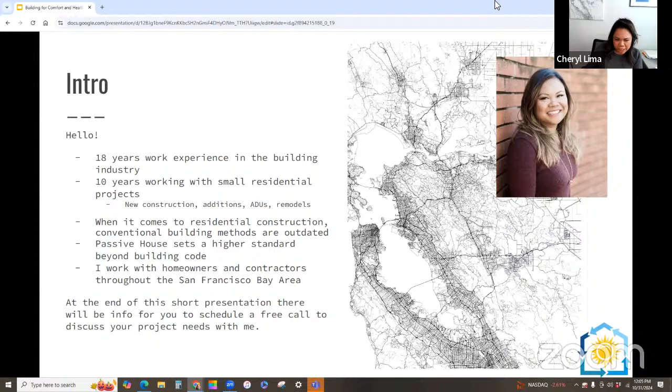So let's just keep moving forward. Today we're going to talk about the key principles of Passive House and how you can apply it to your project. And the way I see it is if you're going to be investing in your property, you might as well do it right the first time. And with the way climate change is going, whether you accept it or not, it's a factor that we have to deal with. So Passive House allows you to stay ahead of the trend as far as building advancement.

So the term passive, it's been around for a while with different meanings. Since the beginning of civilization, we have had to design our built environment around the natural patterns of the sun and weather based on your location. And with the invention of mechanical systems and more sturdy building materials, we've been detached from nature.

And actually in the 70s, the passive solar movement started, or I guess in the 60s it started up again. But that form of design didn't quantify the effects of energy, and a lot of times they put too much glazing or too many windows in direct sunlight, so it would create a very uncomfortable home environment or building environment.

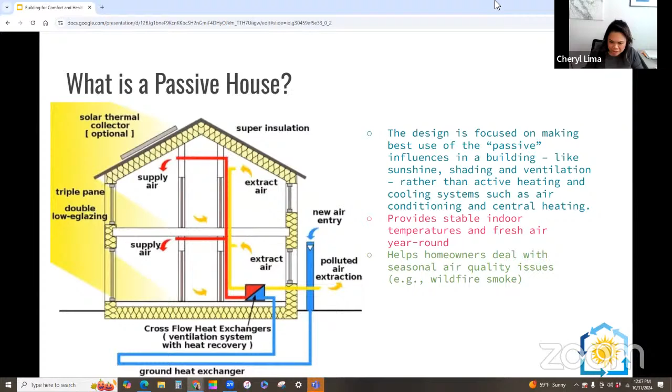So with Passive House, which started in the 90s, it was actually created by a physicist who got into the physics of thermodynamics and building science. So it can get very technical, which is why most homeowners don't know about it. But this next slide is a quick video to help explain it. Let's see. Oh, I hope you can hear this.

Passive House explained in 90 seconds. Does your house have a heater in the basement or maybe a fireplace? Probably also a central air conditioner or maybe a window unit. Did you ever wonder if it was necessary? In 1991, Dr. Wolfgang Feist built the first passive house in Germany based on research from all over the world. Here's what he did. 1. Proper insulation. It's just like wearing the right winter jacket. It also doesn't need a heater. 2. No air leakages. There should be no holes, small or large, to let warm air out of the house.

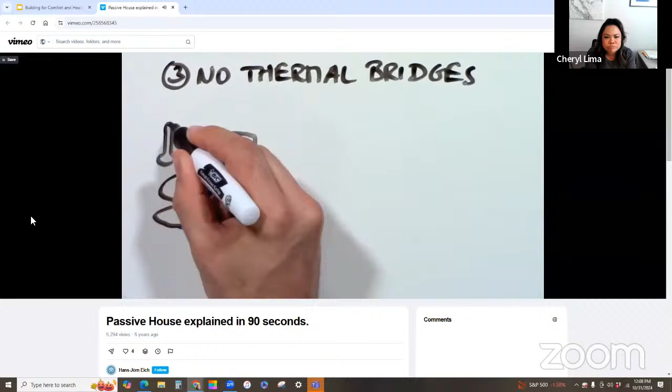3. No thermal bridges. A thermal bridge is like a road for heating energy in which warmth can travel right through your walls. As a matter of fact, most of our houses have thermal highways in our walls where heat can easily travel to the outside. Plus, the house needs proper windows, most of the time with triple pane glass, and it needs to be oriented properly so the sun can heat it in the winter and the shade is provided in the summer. And it uses an HRV, a device that provides the inside with fresh air without letting the heat out. Add all these things up, and it turns out your house doesn't need a heater or an air conditioner.

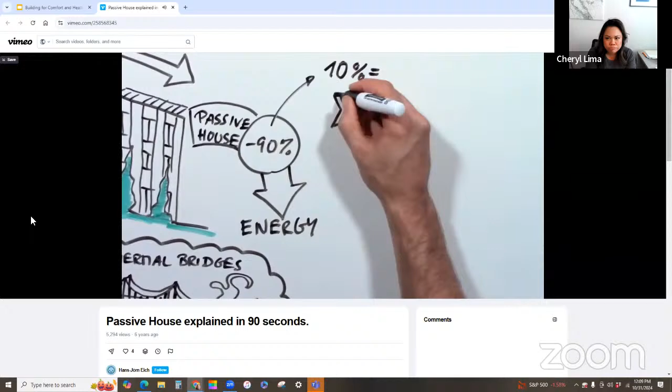So where does the heat come from? A passive house needs 90% less energy, and that can easily be supplied by your body heat, the sun, your appliances, light bulbs, and even your TV. This saves you a lot of money on your heating bill and helps preserve the environment. Did we make it in 90 seconds? You bet we did.

Okay, so that just gave you a quick overview of what passive house covers. So let's get into a little bit more detail of the principles. So the first one was super insulation. So the example was a jacket that they showed. Another example would be like your Yeti cooler or thermos.

So the thicker the insulation, the more you can keep hot temperatures hot and cold temperatures cold. So compared to glass, where it immediately escapes since it's not insulated. In this case, in the form of a Yeti, or this is Starbucks, but in these type of coffee thermoses, they're vacuum insulated for the most part.

But in a construction or building, we would use insulation. So the insulation could either go on the inside, like if you're doing a remodel and you can't access the exterior, you would install insulation in between your studs, or even in a remodel, you could do it on the outside. So this is mineral wool here. Rockwool is a manufacturer of this.

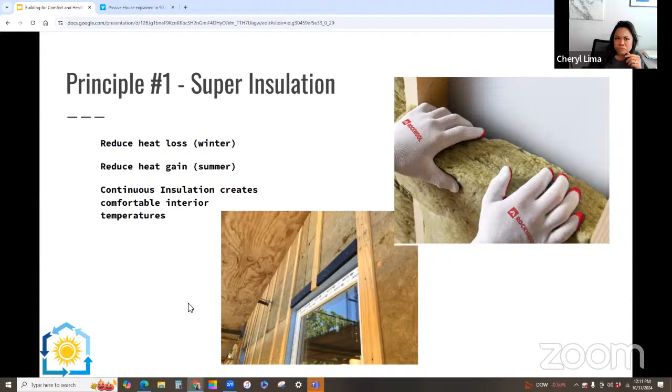Right now by code, you're required to have R19 wall insulation, where passive house would warrant maybe R40 or R50. And it all depends on how your home is designed or laid out.

The second principle is airtightness. So airtight construction, you want to seal all gaps in your building envelope. So I don't know if you've ever heard or felt it on a stormy day. You can hear whistling coming through small cracks, whether it be like your receptacle or drafts underneath the door.

So the airtightness is a big component, and it creates a very sturdy building structure, because you're keeping out moisture, and you're keeping the thermal insulation dry and airtight. So, I mean, it's called airtight, but there is a small percentage of air that gets in. Nothing is 100% airtight.

So this allows your insulation to perform at its desired performance, and it helps keep pests out. So all the little cracks and nooks and crannies where they can get in should be sealed. And this is a test with Passive House to get certification, or you could also test it just to see what your air changes per hour are in your building by doing a blower door test.

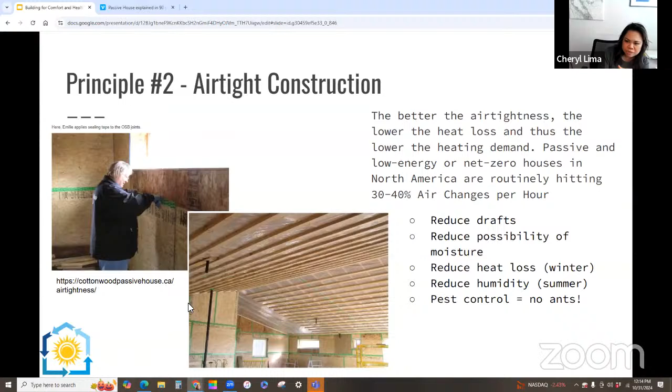So the third principle is to eliminate thermal bridges. So these are points in the building that could possibly create a condition for potential heat loss. So depending on materials, like say that your house has a balcony and the framing of the balcony floor cuts through and connects to the interior floor, where the joist cuts through, that would be a thermal bridge at that point where heat can escape.

So during the design process and modeling your building, we're looking at those potential points where heat could be lost and figuring out ways to mitigate that. So the reason why we want to reduce the thermal bridges is it could create an inconsistent temperature, as you can see in these thermal photos here of looking at the corner of a wall.

So whenever a cold surface meets hot air, there's a potential for condensation, which is when water reaches its dew point, and then that causes mold. And then if you have mold, it could cause respiratory illnesses and increases the rate of asthma. And actually 70% of existing homes have mold. So there's a good chance you have mold in your house. I know I do. So like I said, I'm in the process of designing my personal passive house.

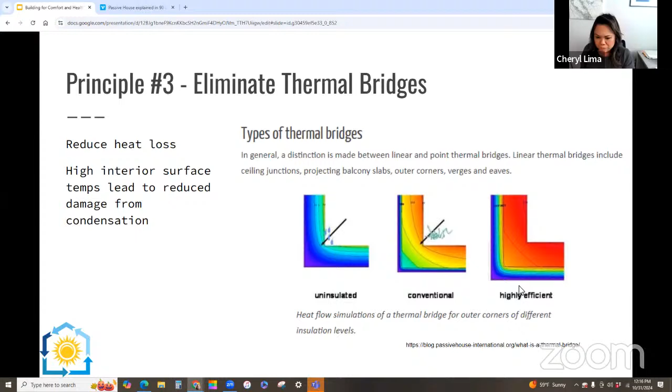Okay, and the fourth principle is high performance windows. So going back to that analogy of a thermos or the jacket, the windows, we need them for code. I don't want to get too technical, but you need a window in every room. So we need them for our health and for building code.

But regular glass is normally not insulated. So we want to get glass windows that are insulated, typically double or even triple pane, because that air gap in between the window panes allows for insulation. Because again, we want to avoid condensation. That's where the cold surface temperature touching a warm temperature could cause moisture to turn into liquid.

So we want to up our investment in the windows. When it comes to Passive House, there is an increased cost in window installation, or the windows you're picking out are going to be more custom and special ordered. But this ensures the insulation and performance of your overall building. So you pay a little bit more upfront, but in the long run it pays you back over time.

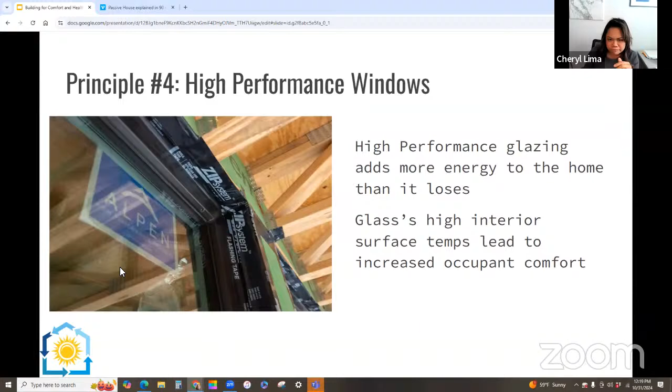Yeah, so the next principle is mechanical ventilation and heat recovery. Because the home is airtight, we want to ensure that fresh air is always circulating through the building or your home. And that's done through an HRV or an ERV. There's a difference: there's the HRV and then there's the energy recovery ventilator, the ERV. The ERV would be ideal.

And that also takes interior air, filters it, and then pushes it back into your space. So you're using a combination of exterior and interior air, and always filtering it through. This creates improved indoor air quality because you're always having fresh air cycling through your space.

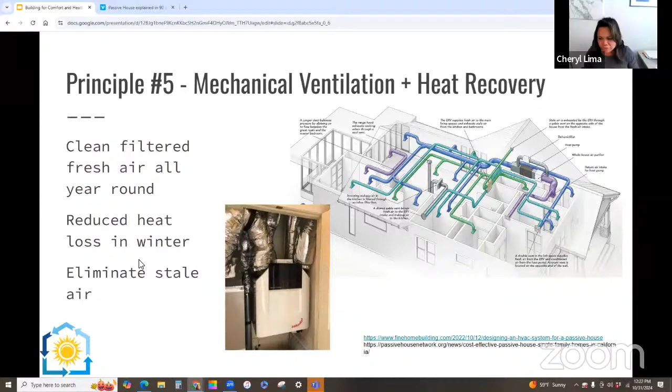But the overall process as far as design and adding to your home is still similar. You can have whatever you want: small, large, high ceilings, low ceilings, or minimum ceiling heights. Passive House applies to every building, even commercial and apartments. Hopefully in the next few years this movement expands and we have more energy efficient homes out there.

And when your home consumes less energy, you're paying less for energy. I've done calculations for homes where you're reduced from $2,000 a year to $80 a year in total electricity costs. So besides the cost savings and environmental impact, the main benefit is your indoor air quality is definitely increased, and that improves the overall quality of your everyday life. So it's something that I am aspiring to, and I hope to help many others obtain a passive house as well.